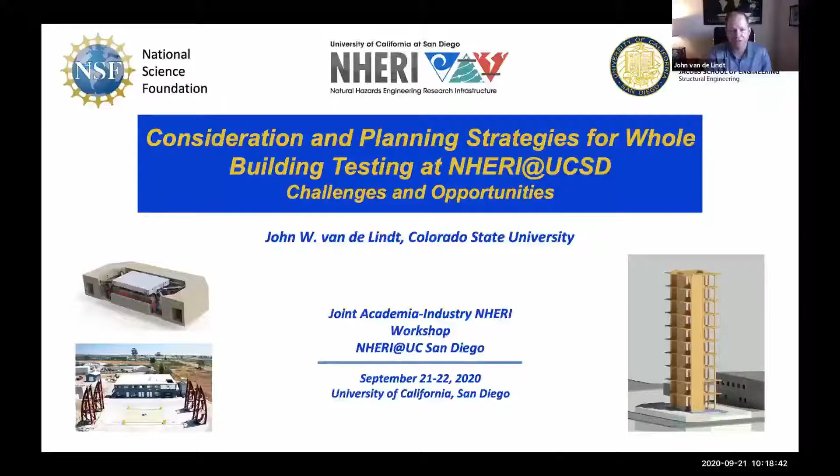And so in today's presentation, I'm going to talk a little bit about where I see the current status of building level systems research, where we should or could be going and why, and then obviously talk about academia industry collaborations in 2013, 2017. Again, the opportunities and challenges, and then four grand challenges that are all interrelated for buildings. And I'm going to talk about this in the context of wood systems, as you can probably guess, but again, these are applicable to all types of systems. So that's just the examples.

So there's a National Academies report. This is actually the Gulf research program, so this is not as much related to earthquake engineering, but they basically have said a new kind of research is needed that can address the dynamic state of communities and their change in risk and resilience over time, can link information or data from disparate programs with each other into community resilience priorities, but ultimately to link research, data, and information with decision making.

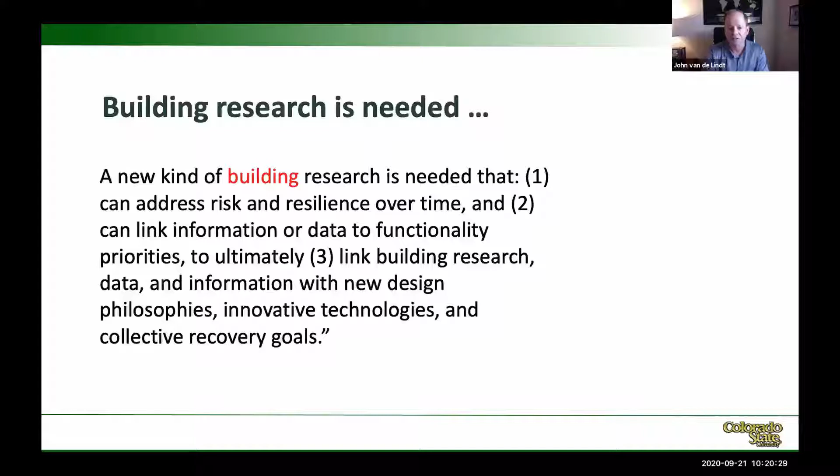So I morphed that a little bit for buildings, and the first two are effectively the same, perhaps replacing resilience with functionality priorities, but it's really to ultimately link building research, data, and information with new design philosophies, innovative technologies, and then collective recovery goals. And I'll talk more about this collectivism within building research for communities.

So I want to just touch on the stages of resilience. Generally in earthquake engineering, at least over the last 50 years, we focused a lot on hardening structures through retrofit and things like that, with the goal of enabling quicker recovery.

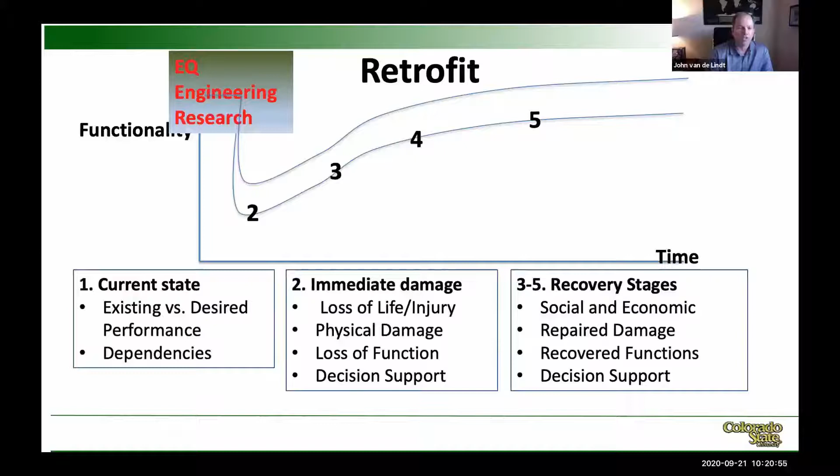So for structural design, as I was preparing this slide, well, structures are generally designed at the sub-assembly level. So, for instance, in wood, we would design shear walls and then put them in the right locations, and the idea is that together they resist the extreme loading, and so it's implicitly providing that resistance or that seismic capacity.

But there's these rare events, and as I was preparing this slide, I started to see that a lot of these events are starting to not seem so rare anymore, but they dictate changes in and corrections to codified design, and we change the philosophy and we recalibrate over the decades or the years, but it does take time. And so modeling at the system of systems level is becoming more and more accurate.

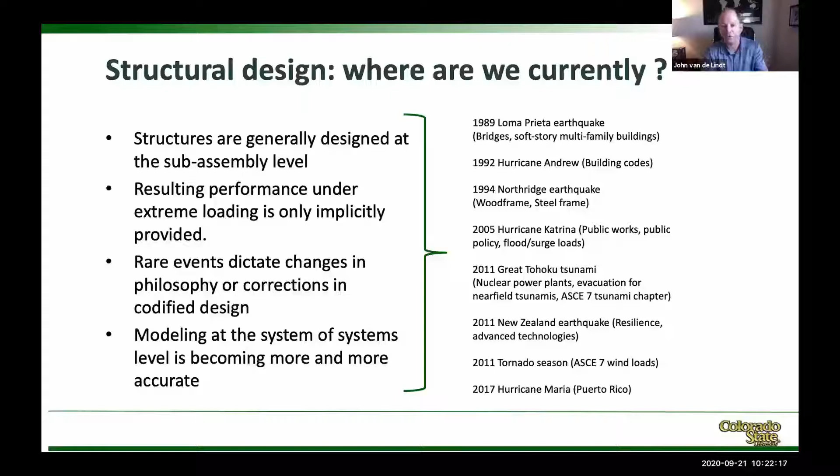And so, as Joel mentioned in his earlier presentation, a lot of the testing that we do is so that we can model. So the question then becomes, do we need to test whole buildings? And so a few other questions then come to mind. How accurate are our nonlinear numerical models? So you can see me standing off to the right there under a big mass. And if that's a single degree of freedom model and I developed it and I'm sure of the ground motion, then yeah, I probably trust the response that I'm predicting.

If it's 1,000 degrees of freedom or 10,000 degrees of freedom, and they're all interacting and you've tested some components, but not all of them, and you've not tested the system, do you trust it? Are you under the mass? So components and subassemblies also have different boundary conditions, like everyone in the audience here knows, and they're difficult to enforce in space and time. We just had that great question about the rotational effects on the shake table, and those are things that have to be accounted for.

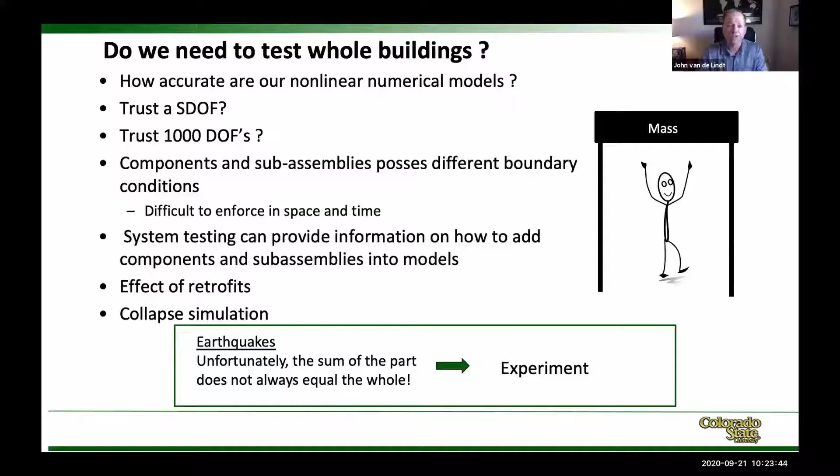And then system testing essentially can provide information on how to add these things in, the effects of retrofits, and then of course collapse simulation. And so essentially, the sum of the parts doesn't always equal the whole, and that's why we do these whole building tests, or at least that's why I've worked on them.

So then we go up even a step further, the system of systems. Recent disasters have revealed shortcomings in the design and the performance of individual facilities, but there's also a financial limit to how much funding can be put into these, and there's also private funding as well. And so a community is essentially a system of systems, and each building that we're modeling on the shake table is its own system of all these components. But then we put them all together, 10,000 or 100,000, to essentially form a community or a city.

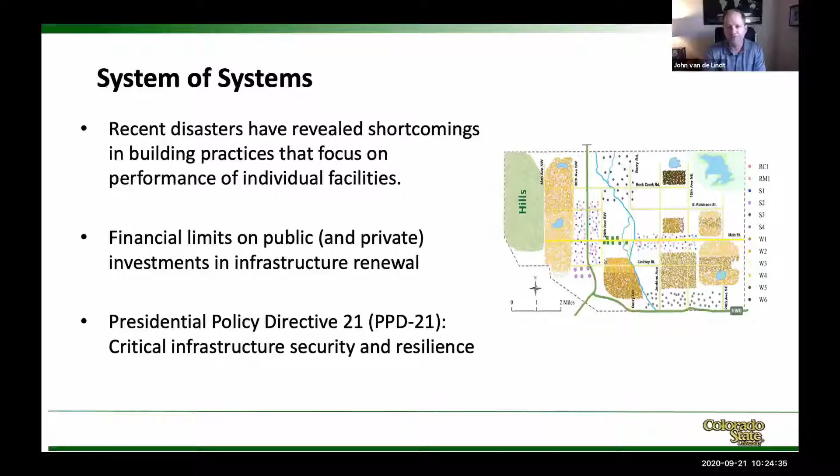So one of the challenges, there's a number of them, but one of them is the existing systems, and that's the performance of buildings and how we can make cities resilient, building by building, as we're testing these, as we're doing research in this area.

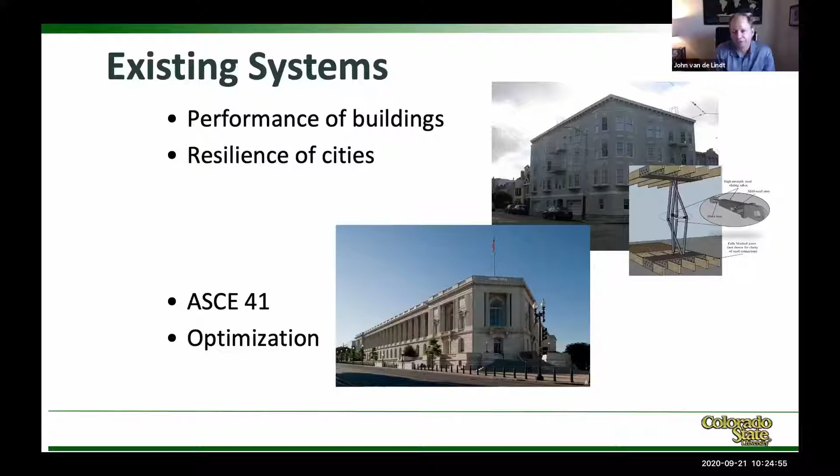So this brings me to just an example of a large test program that we did. It was the final test and finale, a test program of 4 months at the UC San Diego site. This was back when it was called NEES. I suppose it would be NEES-Soft we were doing.

And so as many of you know, especially if you're in the Bay Area, many of these buildings, these 4-story light frame wood buildings, were designed, it says prior to the 1970s, but it was actually back in the 1940s, many of these. And so there was a CAPSS program that looked at developing a relatively inexpensive approach that didn't disrupt the renters or the people living in these, and so they were first story only.

So this was a five university industry collaboration. It was primarily funded by NSF, but as I'll talk about in a little bit, a lot of times by the time we get to this grand finale at the end of a multi-year project, there's not a lot of budget left to do a test, even if that was the idea.

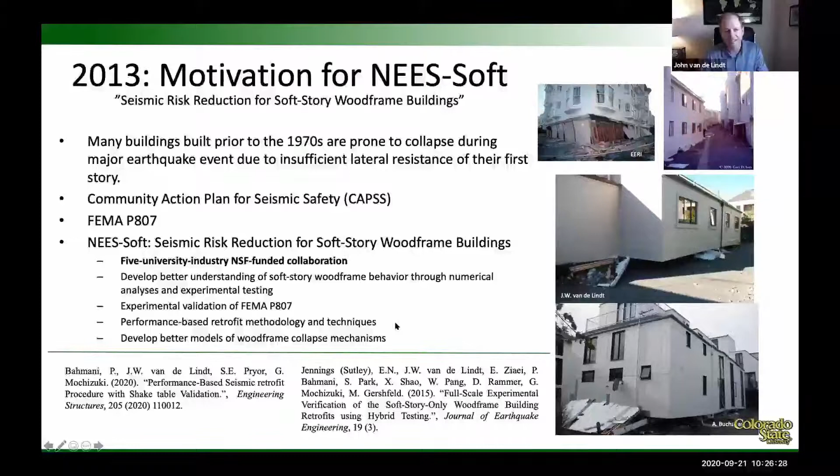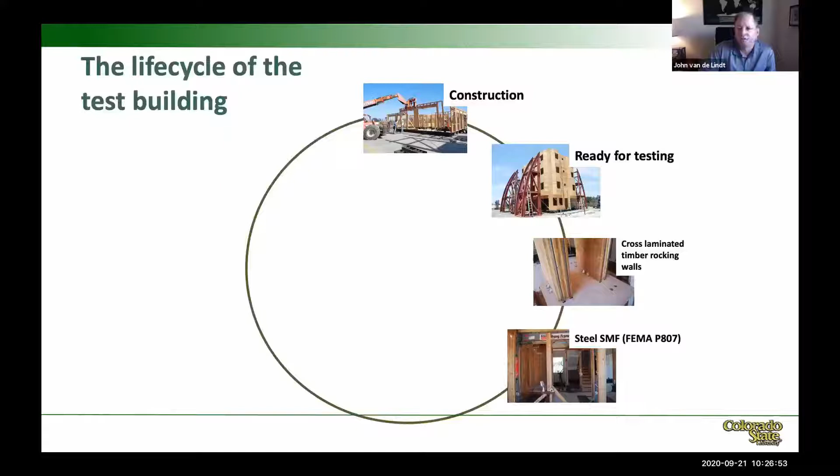So the building, as I mentioned, we had different phases. I'll just run through them real quick. We had our construction phase. We were ready for testing. You can see the towers that you saw in past presentations for safety. We did a cross-laminated timber rocking wall retrofit, steel special moment retrofit, partnered with Simpson Strong-Tie on that. And then a steel moment frame with wood structural panels, and that was a performance-based seismic retrofit.

And that was really the purpose of the project, developing that, as well as looking at the FEMA P-807 retrofit accuracy or effects. And then viscous damping devices, and those were a partnership with Taylor Devices. And then collapse testing, and I'll talk a little more about that, and then recycling.

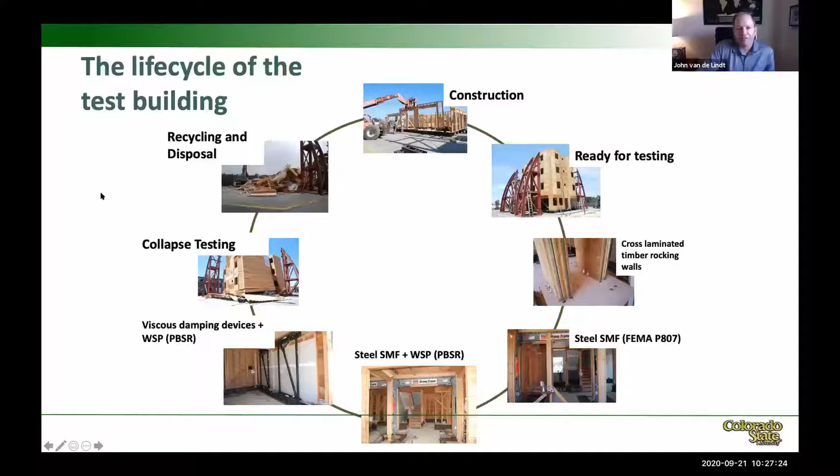And then we had 5 REUs. We were very fortunate, and it was a tremendous program. They did a big bulk of the instrumentation. I think almost all of them wound up going to graduate school, if I recall. And then our 2 PhD students leading that, one from RPI, and my student from Colorado State.

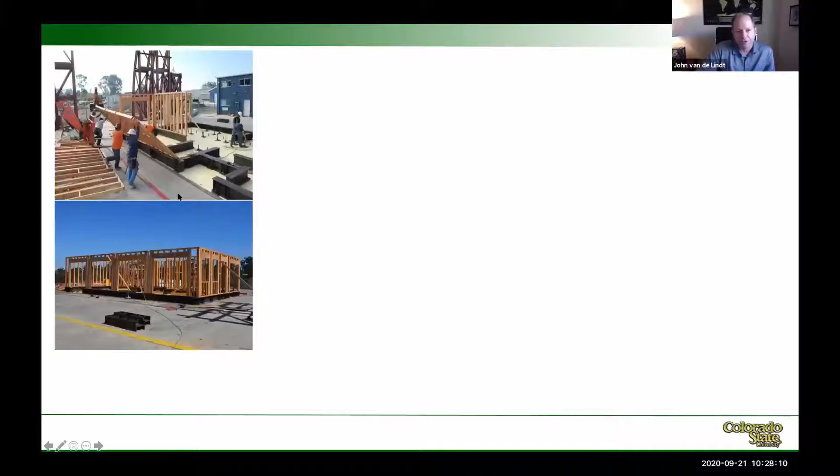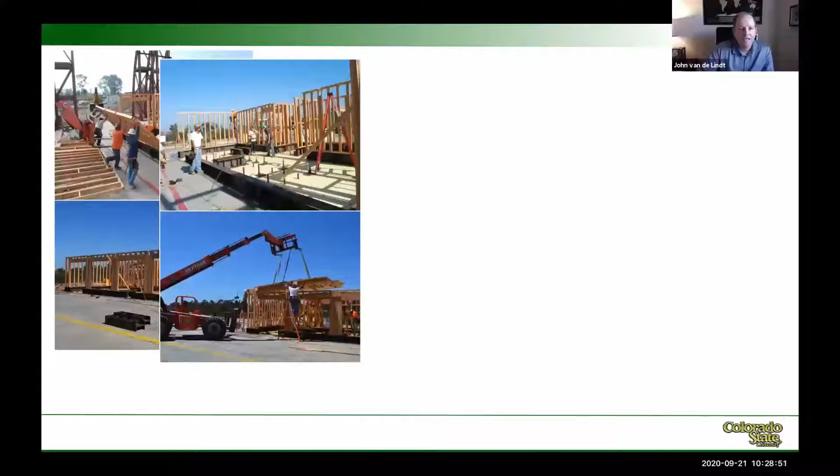So just a little bit to show you the construction. Like you heard from Tara and others, these are massive undertakings. You're essentially building a real building, so just to show you a little bit of that. And then when it's finished, you compare it to our existing buildings, and it's of course limited a little bit by the shake table size, the footprint, but it's as accurate as you can get. Building ready for testing.

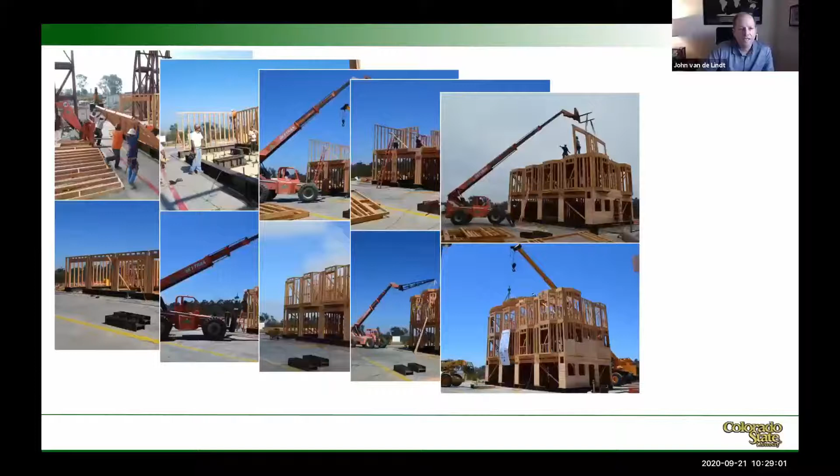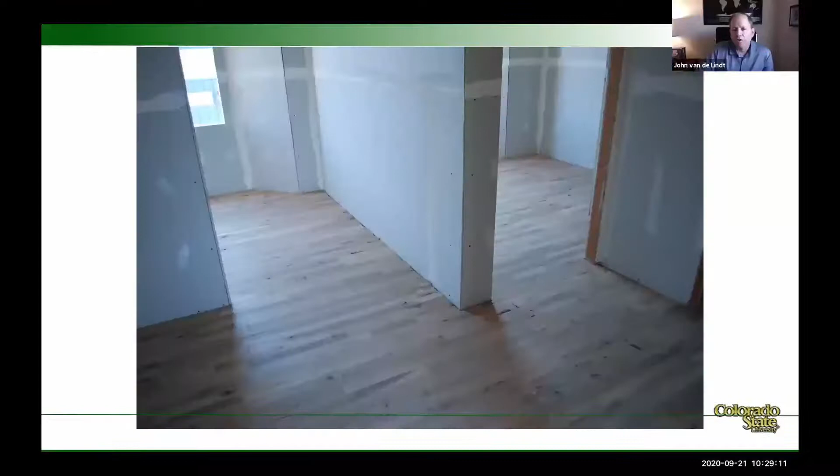Now, one of the unique things, and these are decisions that you have to make as you go through, was these buildings were built so far back that there really wasn't any steel connection hardware available, so it was essentially wood and nails. And so this was the only building I've ever tested where I had a finished floor put in, and that was because it actually provided stiffness and strength to transfer load throughout.

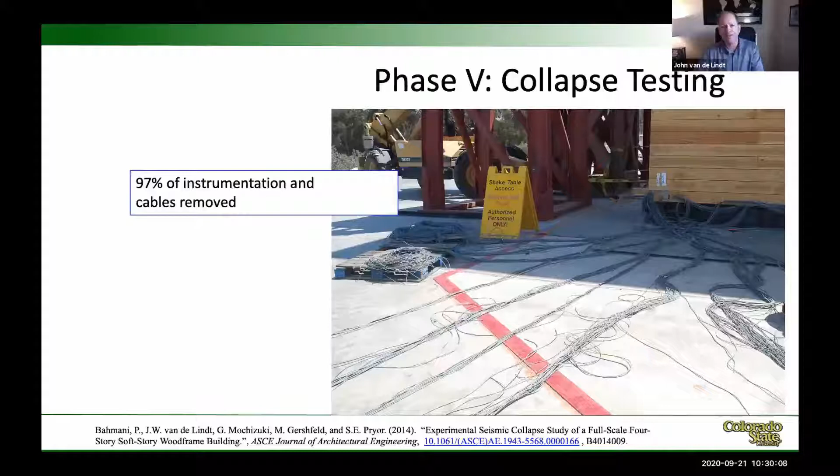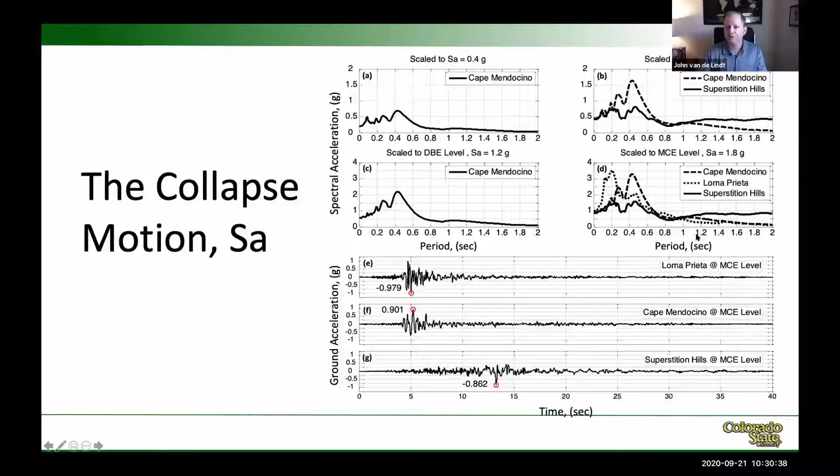The collapse motion here, hopefully you can see my cursor, looking at the MCE, this was scaled at 1.8 g. The building period, when all the retrofits came out for this 4-story building, was actually almost 1 second. So you can imagine how soft and how weak these buildings are. And so you're over here. And it really doesn't look like there's much difference between the motions. But then we jump to the spectral displacement, and what you see is, again, it looks fairly similar.

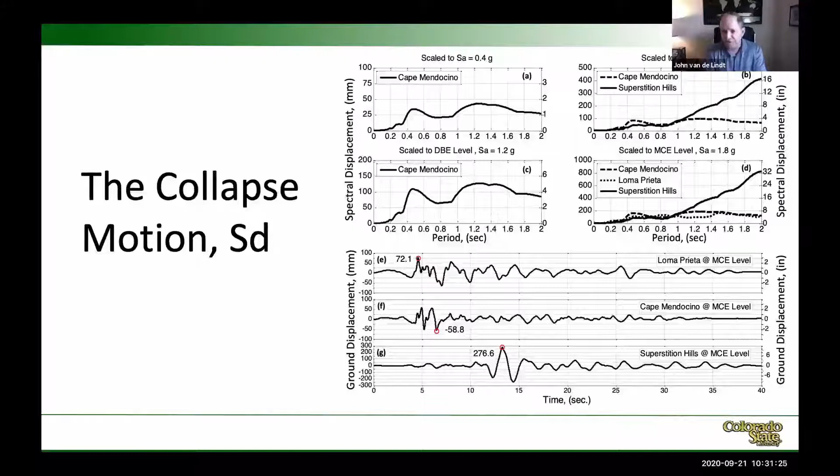But what you notice is as the building softens, as it climbs from 1 to 2 seconds, then Superstition Hills, and many of you are likely familiar with that motion, has a massive ground displacement, and so we can see that here. So we chose that for the collapse motion test, and the main reason for that is from years of collaborating in Japan, one of the things that I learned, and many of us learned, from our collaborators there, is that the acceleration rarely collapses these types of buildings. It's really the displacement, and so it's essentially pulling the rug out from underneath the building.

So here is the test. I've taken away the sound just because it causes some feedback on these presentations, unfortunately.

But so you can see we're shaking with the Superstition Hills motion at scale to MCE. And you can see that bottom story extremely soft. There's 4 one-car garages down there. And remember, no retrofits in here. So our goal is to improve our models of collapse testing. And here you can see we're barely hanging on at almost 17% drift. And so same motion, and what you'll see is it never manages to come back to equilibrium. It tries, but

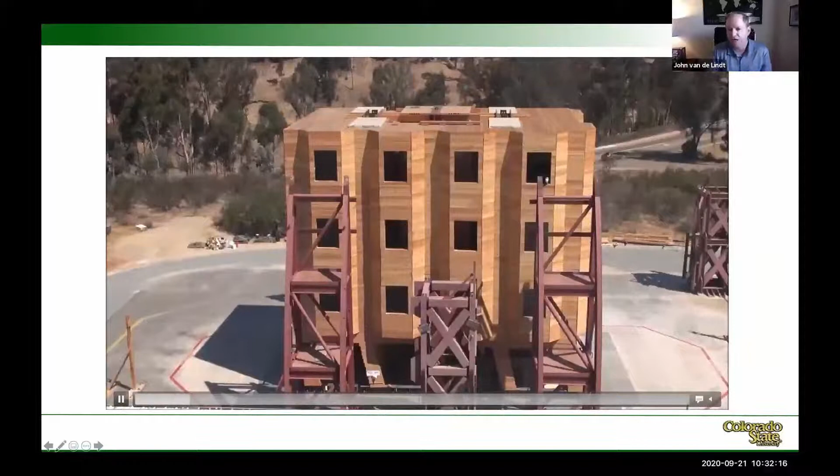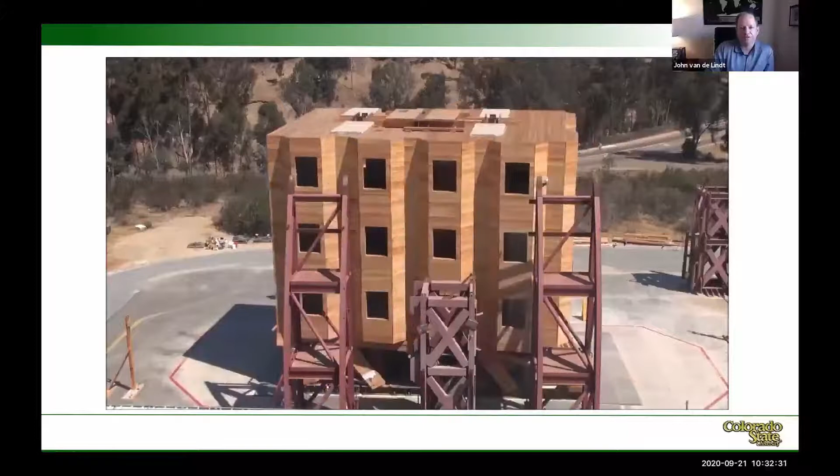And I always get a kick out of, I think somebody in a car stops up here, if I recall. I think that was on the first one. Sorry, they stopped. I think they thought it was a real earthquake going on.

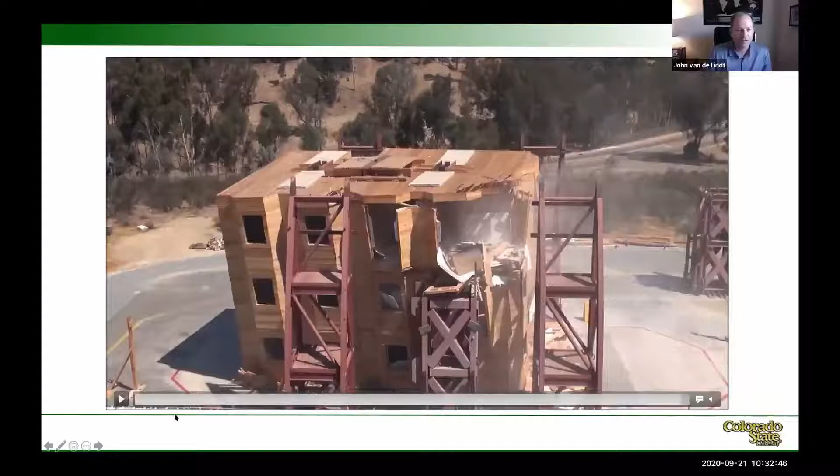And so on this tower right here, there was a camera. So I'll show you, and so here we see this is that camera view. It's looking into, you can see the people down here watching in the distance, visitors. It was a media day. And we did have furniture in here, but unfortunately, it was a morning test, and so we just couldn't get the sun angle correct. So you can almost see that in there. And that was one of the sacrificial cameras that we used.

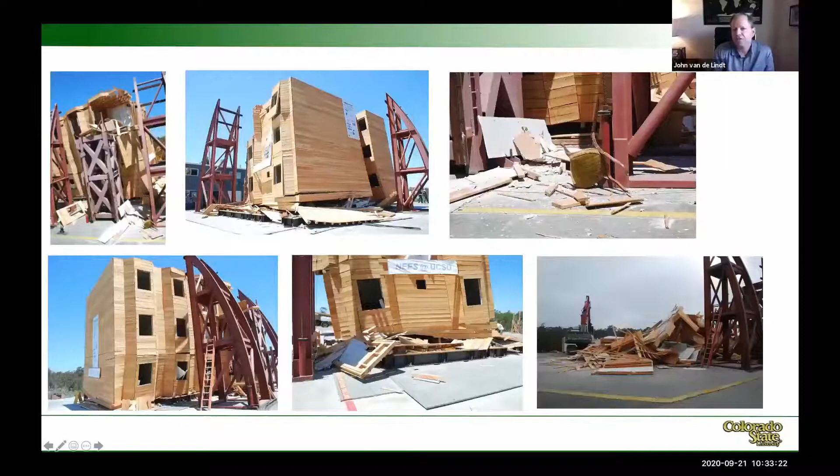So here's the aftermath, essentially, of the test. And so this significantly helped us improve our modeling. We also had cross-laminated timber rocking walls. This was the first time that CLT had been tested. These types of rocking walls have been tested in the US, actually, I think anywhere in the world, for rocking walls on a shake table.

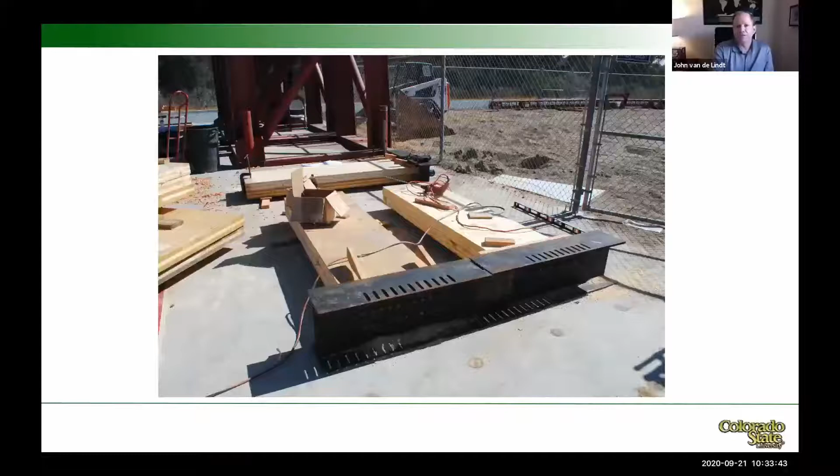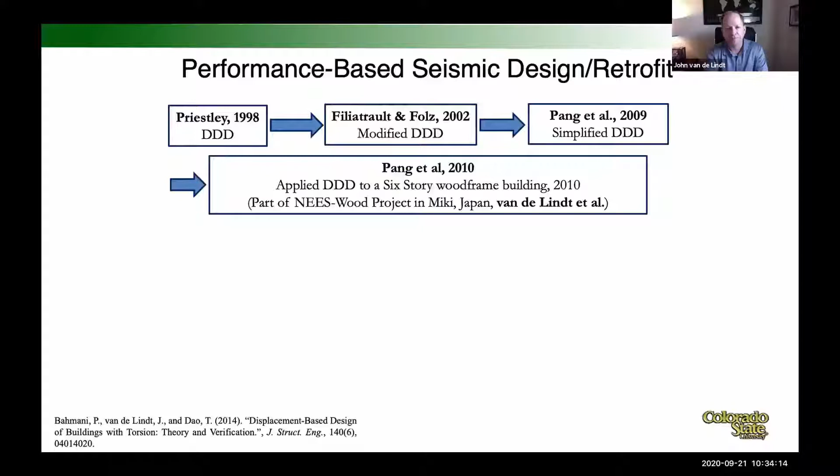And then I want to show a little bit more on the performance-based seismic design and retrofit. We borrowed this logic from direct displacement design by Nigel Priestley in 1998. Andre Filiatrault and Bryan Folz improved upon it for wood, and then Pang in the NEESWood project. I won't be talking about NEESWood today, but then we took that design, that 6-story building in Japan, using that design approach and tested.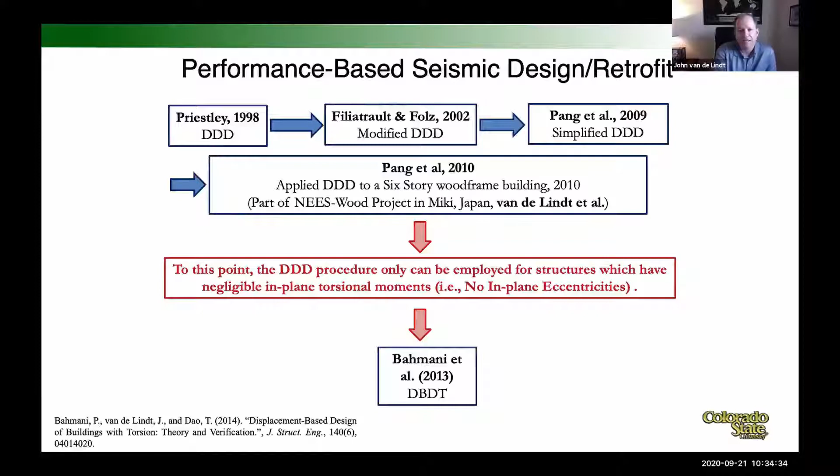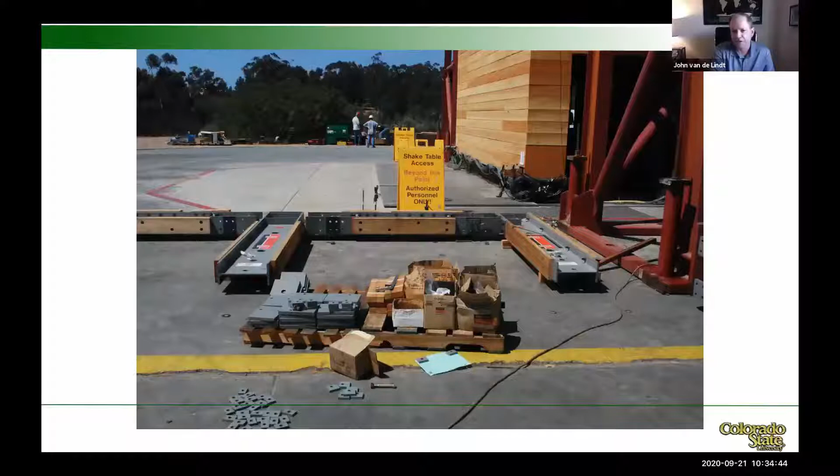But to that point, it couldn't really handle in-plane eccentricities and in-plane torsion. And so Bahmani et al., as part of this project, NEES-Soft, improved upon that, and that's what we used to do this design. So here you can see this is our partnership with Simpson Strong-Tie. They partnered on NEESWood, NEES-Soft. They'll be partnering on the 10-story test as well, as you'll see.

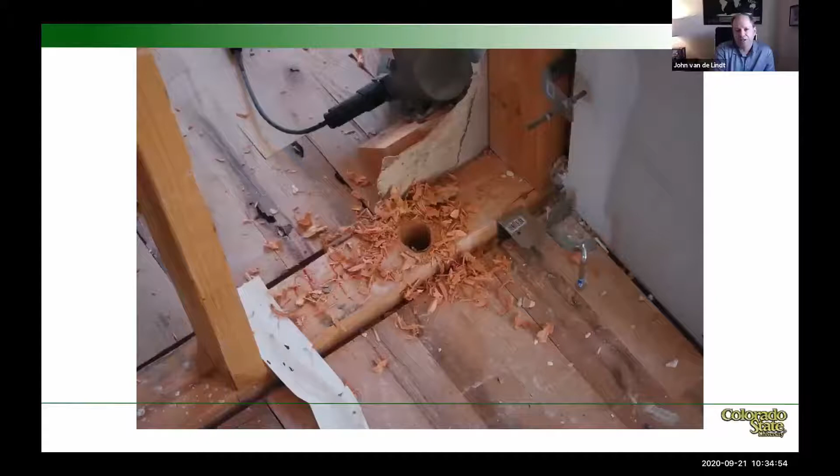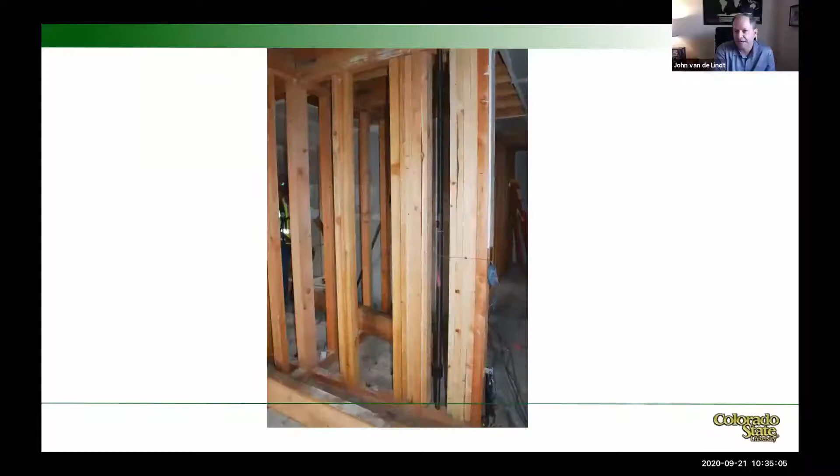So this was the big center of the building, intersecting shear walls and putting in continuous ATS rods. And here you see going through the floor. So we're pulling drywall out, working on this, a big stud pack being toe-nailed in. And here you see on the bottom floor, this 2-bay frame is in the direction of the motion, and right above here you can see the shear transfer from the frame into the diaphragm, and then above that is the stack of shear walls, that intersecting shear wall.

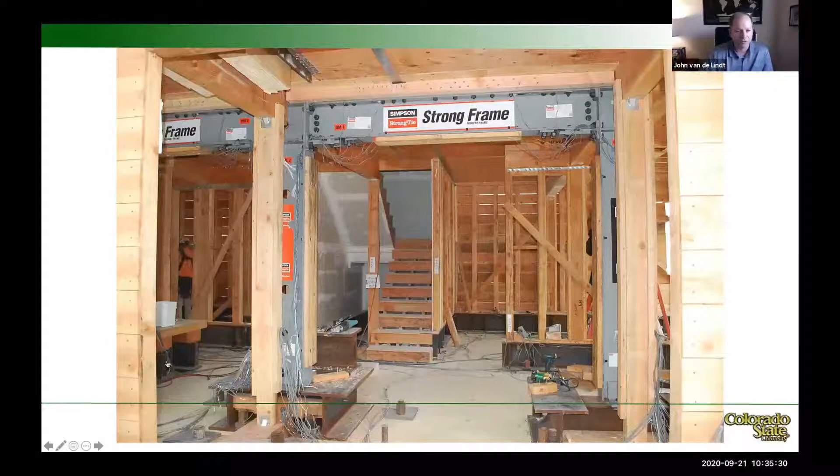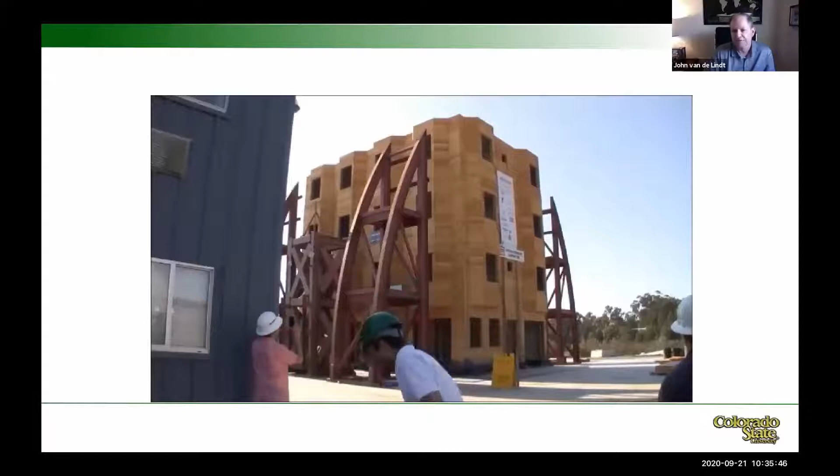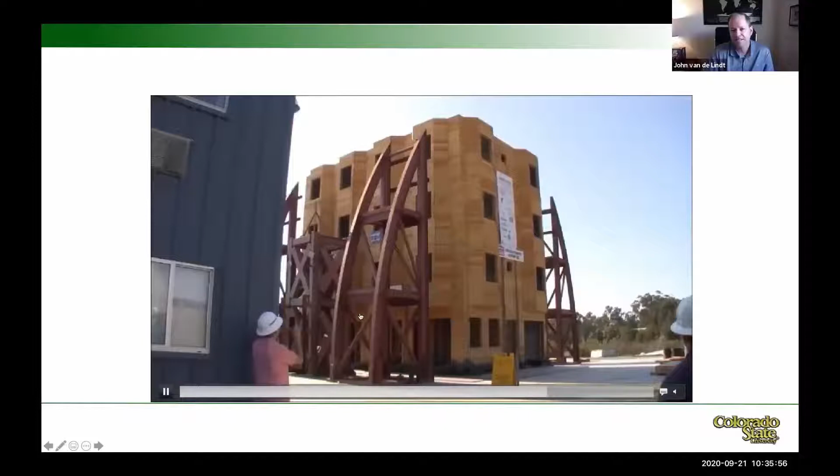And so just show a quick video. I think it's not quite the same quality as the other, but it'll get the point across, and you'll see a quick tour. It's very fast. This is, I think, Loma Prieta, and the building was stiffened up enough, and so you can see a slight, quick, kind of surprising, actually, second, almost a third mode, just in a 4-story building that quick. And then the lower frequency doesn't do a whole lot, so we'll jump ahead.

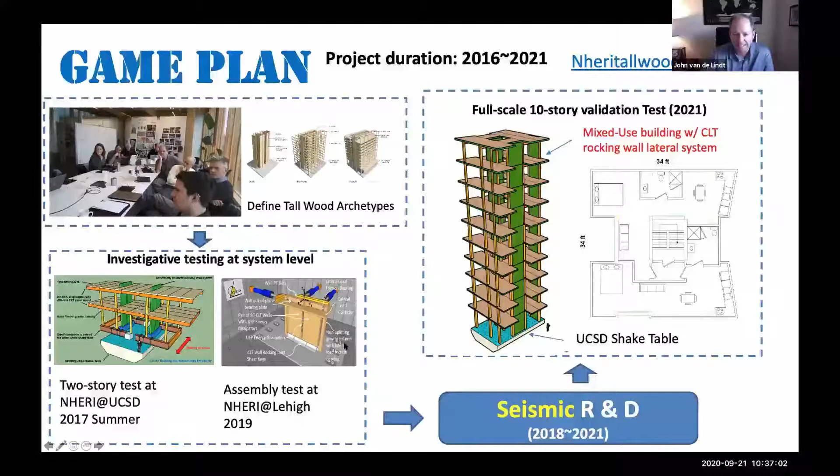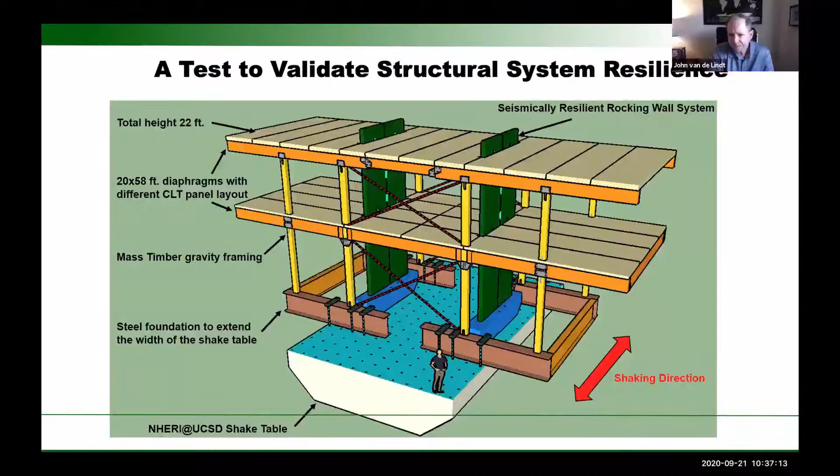So this was the 2-story test. This was done in summer of 2017, and this had, let me show you this a little bit better, you can see. And so here we see this is 2 shear walls, post-tension rocking walls. Here you can see the close-up, and they should start together. There we go. I think they're playing, yes.

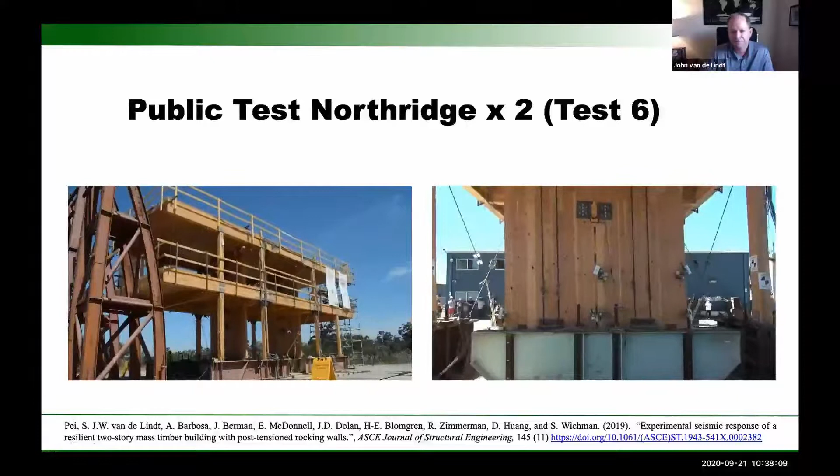And here you can see the motion. You can see the rocking, and then it just runs again, and then here, a little bit better view of the uplift. And this is just to kick back, just to avoid sliding, which we didn't have anyway. But

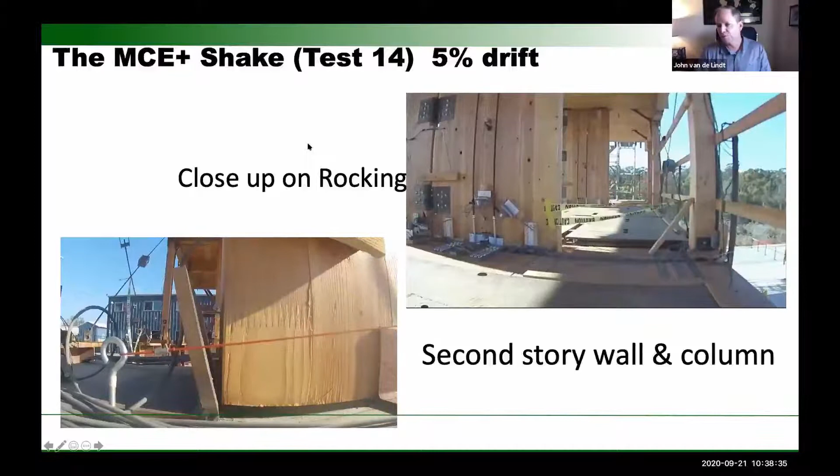And so this went up to about 5% drift. And if you look, this was the extent of the damage on the wall. And here's just an image of pulling the wall out. We're putting it in, same approach.

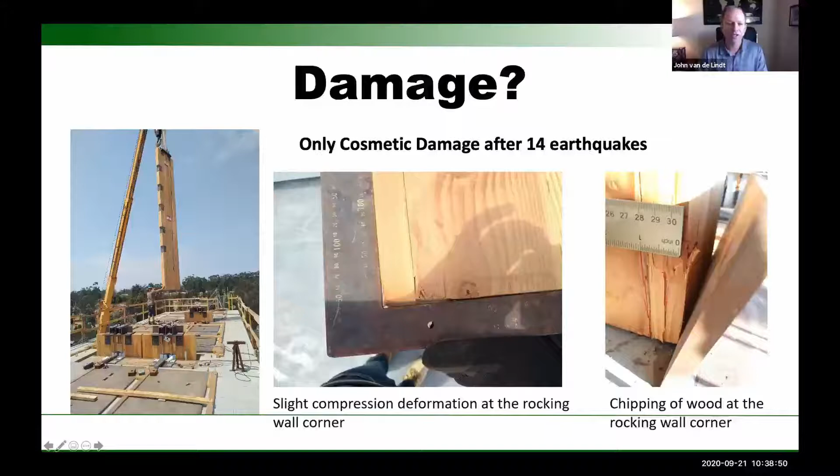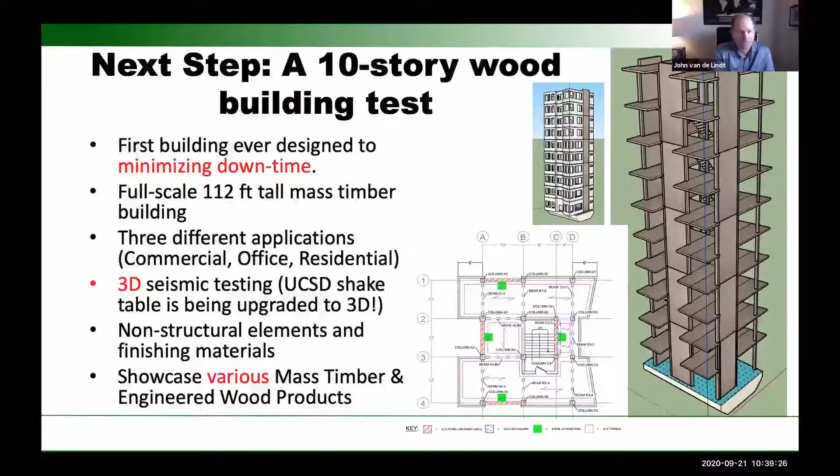So the next step, as I mentioned, is this 10-story wood building test. It's essentially the first major shake table test that we're aware of designed to minimize downtime. And so we're looking at very specific approaches with the various university as well as industry partners. And in doing that, we're developing time to functionality fragilities, which are allowing us to do this. And so I'll jump ahead just to talk about this before I run out of time.

So for opportunities and challenges, I didn't show much related to NEESWood, but NEESWood was again a massive, it was a 14,000 square foot building that was tested. And so the early experiences in 2009, when we spent quite a bit of time in Japan, one thing I noticed is for Japanese projects funded by the Japanese government, I don't think it's required, but there's always industry representatives at the table during the research discussions, starting at the very beginning. They're there, and it's because technology transfer is so critical and so important that it's a requirement for them to get funded. And so they bring industry partners to the table that early.

Project teams for NSF proposals, I also think it's a great idea to include them as senior personnel, not necessarily paid unless they're a direct consultant. And then another thing I noticed in Japan and here as well is ensuring that you give lead time for them to handle their intellectual property and preliminary patents and things like that if they need to do something. So you have to lay the timeline out early enough, because they know how long those things take. We don't always know that. And so that they can work with their colleagues to make sure that that's in place.

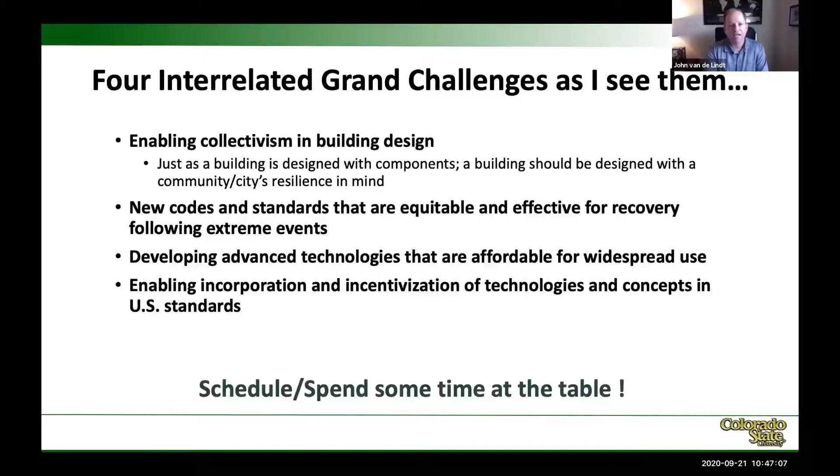And so just to give you an example, I want to thank all the staff at UC San Diego and researchers, but also to show you the number of people that are involved in this type of testing. These are just the people that were involved in that 2017 test. And with that, thank you.

This is Karosh. Thank you very, very much, Professor van de Lindt. Wonderful presentation. There's one question in the Q&A, if it's okay. For multi-partner testing programs, is the researcher seeking out funding, or are the industry partners approaching the researchers? That is, who's pushing initially for the research?

I would say that it's a combination. It can be either and or. So often, it has to be mutual. Industry is not going to work with you as a favor, of course; they need something out of it. That can range from some PR. It can range from being able to develop some of their own products, and that's why I mentioned the IP and the preliminary patent filings, because they may be able to use that as an opportunity to try some of their own things out.